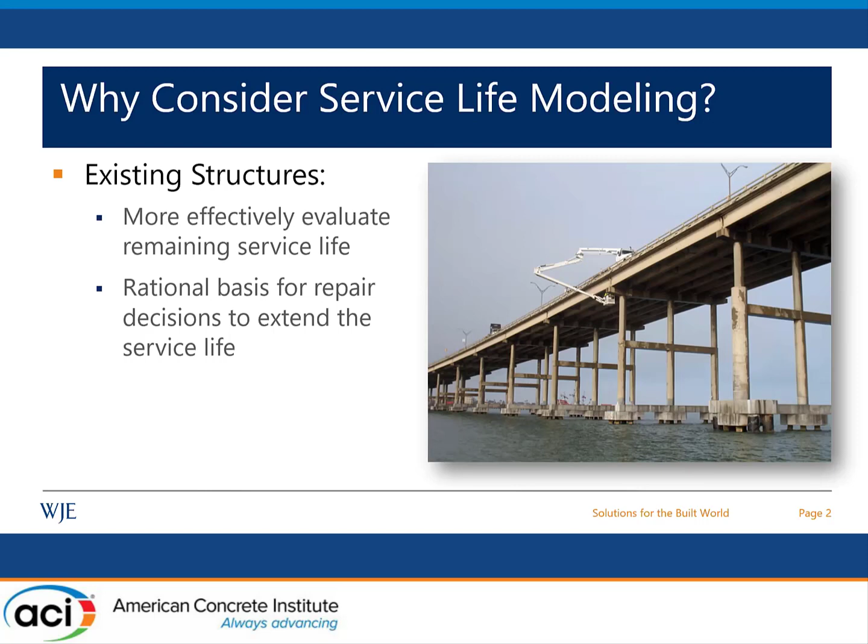To start with a little background, why do we usually consider doing service life modeling for existing structures? We do this type of analysis to more effectively evaluate the remaining service life, and also to provide a rational basis for repair decisions to extend the service life of the structure.

The best approach to predict the service life of an existing structure is by careful evaluation of its past performance and actual current conditions. We do that through field investigation.

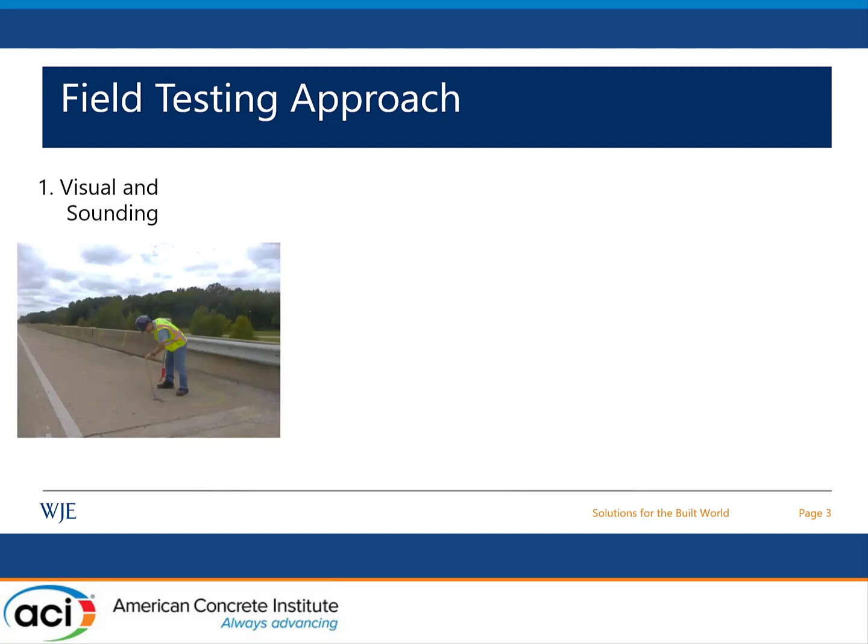Our typical approach consists of overall visual survey and sounding, and also scanning for reinforcement location and concrete cover using GPR or cover meters.

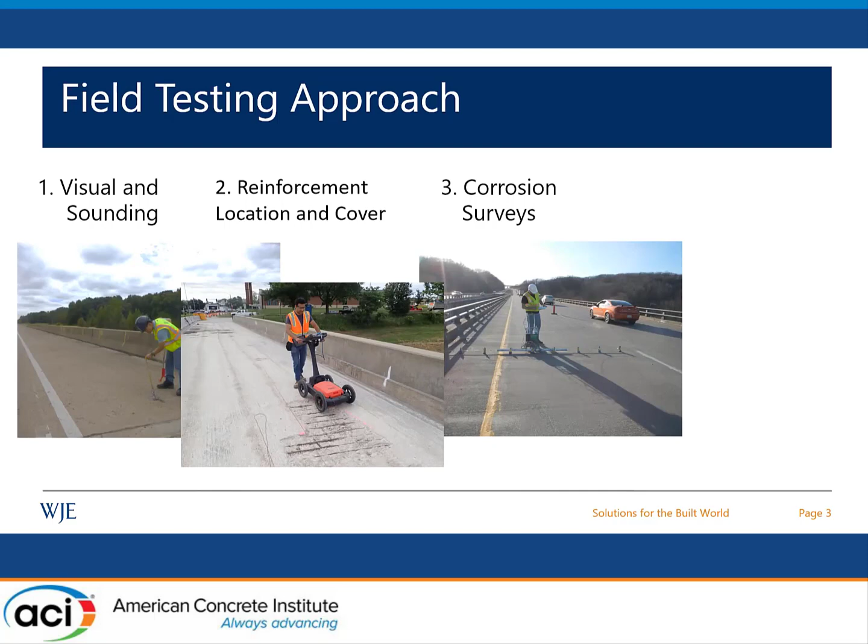We do corrosion non-destructive evaluation to provide an indication of the corrosion risk and also identify the location of active corrosion, using half-cell potential, corrosion rate measurements, and concrete resistivity. Then we collect material samples and perform laboratory testing.

After that, we feed all of this data into our service life modeling software. We use WJE CASLE.

It's a diffusion-based model that also considers the convection zone near the surface, where chloride transport is not necessarily governed by diffusion. Being developed in-house, WJE CASLE offers us full control over the evaluation process to facilitate a customizable approach to the circumstances and exposure conditions unique to each structure.

It can also consider site-specific conditions, including special cases such as sealers, coatings, use of corrosion-resistant reinforcement, and presence or installation of overlays. It can also consider the effect of cracking and pre-existing chloride profiles, which we are going to present in one of the project examples that Elizabeth is going to show us today.

We have used WJE CASLE in several projects, and to consider the inherent variability in the concrete elements, we use a full probabilistic modeling approach that considers a statistical distribution of key parameters controlling the corrosion process. We've used that for existing and new structures, including transportation, power generation, industrial, and government buildings.

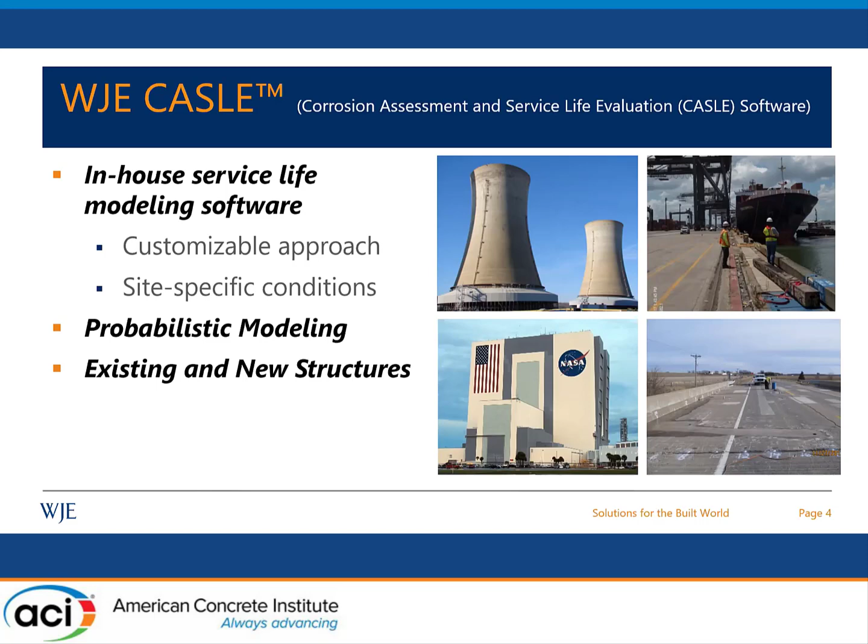As I mentioned, the inputs are derived from the condition assessment findings that we measure directly from the existing structure. These input data include exposure and concrete parameters, concrete properties parameters, and we collect this information based on testing of the concrete cores and the chloride profiles.

Another input is the cover, for which we use a specific distribution of the data collected from the structure. And chloride threshold, which is dependent on the type of reinforcement, also based on the mix design.

We learn about the mix design usually from petrographic examination of the core, or we also validate it based on the bar condition, which we determine through visual inspection of the bars, whether collected in the cores or through an inspection opening.

The output of our analysis would be the percentage of corrosion-related damage over time. Based on the damage threshold or the service life criterion, we can estimate the remaining service life.

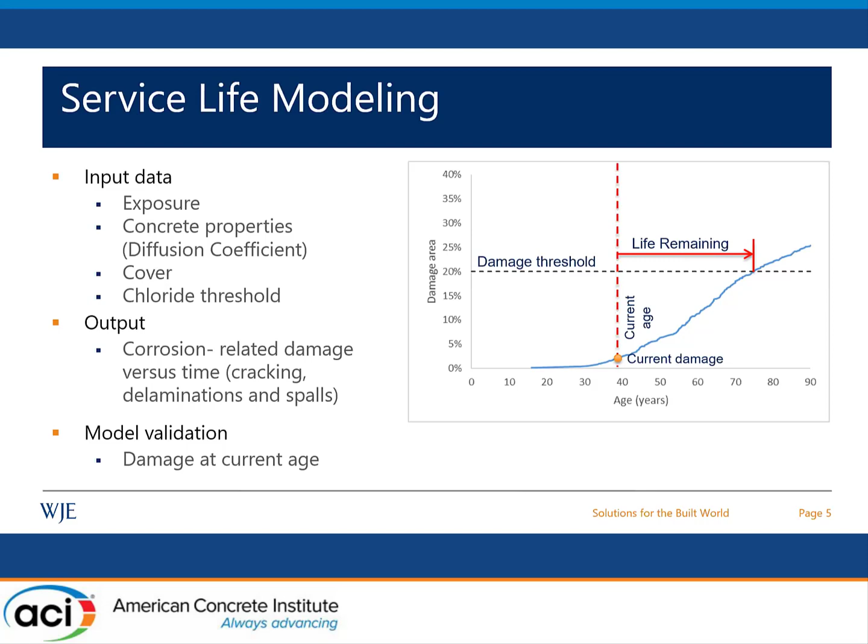Then we validate our results based on the percentage of damage at the current age, which we estimate based on the field investigation.

We did benchmarking and validation of our approach through different projects, including cooling towers and marine structures, and these projects included use of black bars, galvanized, and epoxy-coated bars. We continue to validate our model on ongoing projects.

Today we're going to focus on two project examples where we performed benchmarking and validation.

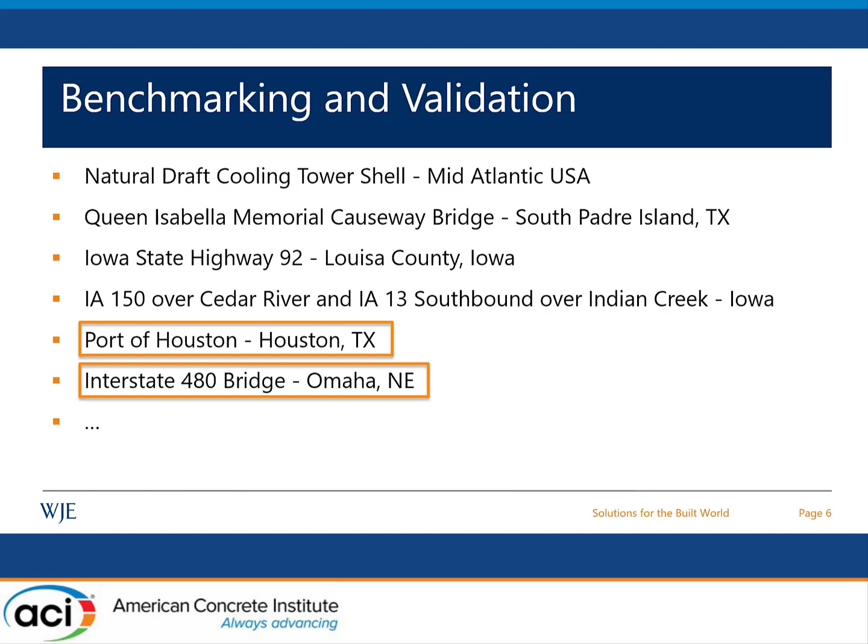Our first project example is Barbours Cut Terminal at the Port of Houston, located at Galveston Bay off the Gulf of Mexico. The water there is brackish, with salinity about one-third that of typical seawater, so there is plenty of chloride to cause corrosion risk in the reinforced concrete elements there.

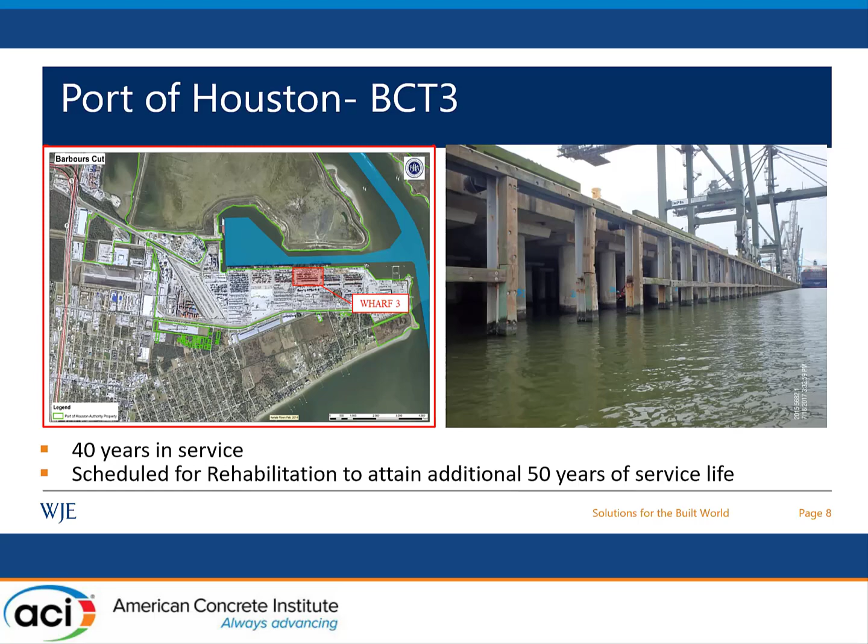We did our investigation after 40 years of the structure being in service. At that time, the structure was scheduled for rehabilitation to attain an additional 50 years of service life. This rehabilitation also included upgrading the structure to support new, bigger-size cranes, which included adding new elements such as drill shafts and some girders and a portion of the deck.

The objective of our investigation was to characterize the current condition of the existing structure to provide a basis for repair recommendations. To do that, we followed the same field investigation approach I mentioned earlier, starting with element-level visual inspection of all accessible elements, then selecting representative study areas for in-depth assessment, including cover measurement, corrosion NDE, and collecting material samples.

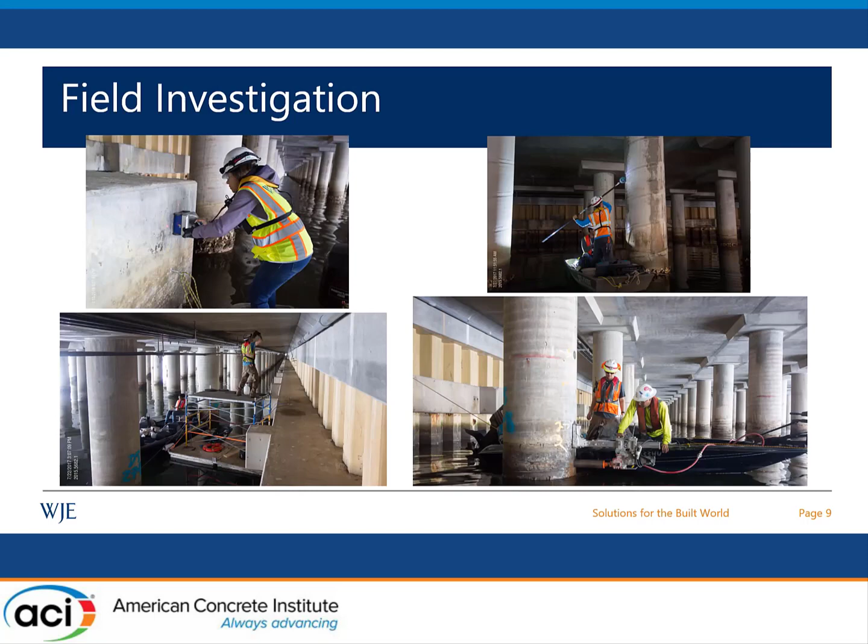So here I'm showing an example of some of the results collected at one of the study areas, on one of the drill shafts. Here's the half-cell potential results and also the location of the cores that we collected. We made sure to collect cores at different heights to capture different exposure conditions.

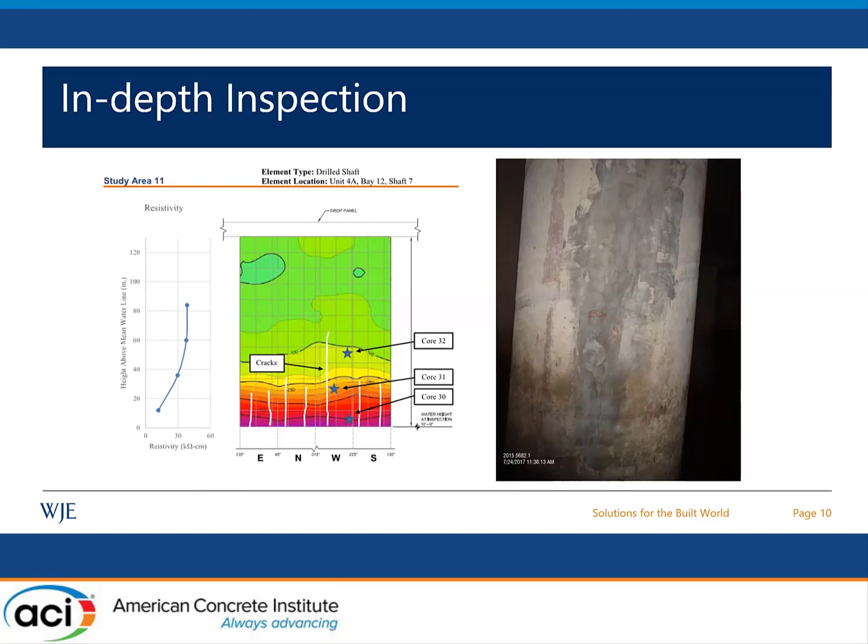Based on the test results we conducted during our investigation, we defined the different exposure zones: soil, submerged, tidal, splash, and atmospheric zones.

Based on our results, we found a strong correlation between the estimated surface chloride concentration and the corresponding height above mean lower low water level at which the cores were drilled. On the right here, I'm showing the figure of the surface chloride concentration estimated for the different cores, shown with the height above the mean lower low water, so with the different exposure zones.

We used this correlation for our modeling. So we used the power model fit for the surface chloride concentration with height. And to capture the variability of the surface chloride at a given height, we calculated the prediction interval, and we used a normal distribution at each height based on the prediction interval limits.

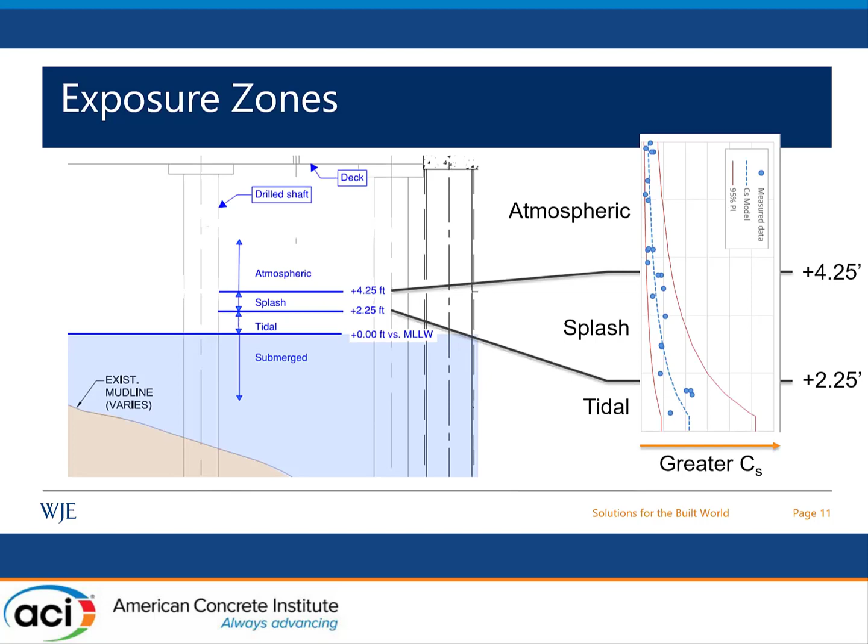So then we used WJE CASLE to perform our service life modeling, and here I'm showing the results for a couple of the elements in the structure: bulkhead beam and drill shaft.

For the bulkhead beam, for example, we had enough information from the field investigation about the percentage of damage on each of the three beam faces - the underside, vertical, and top side. So we modeled those separately over the next 50 years, which puts us at an age of 90 years.

As you can see, the damage is expected to increase on all surfaces with time. And the model actually showed close correlation to the amount of damage that we observed in the field, which verified our modeling results. Based on the results, we identified high risk for future corrosion deterioration, and we recommended preventive repairs needed for all the surfaces.

A similar approach we used for the drill shaft, where we verified our model using our field investigation results. We found a good correlation between the percentage of damage predicted using our model and the percentage of damage from our field investigation.

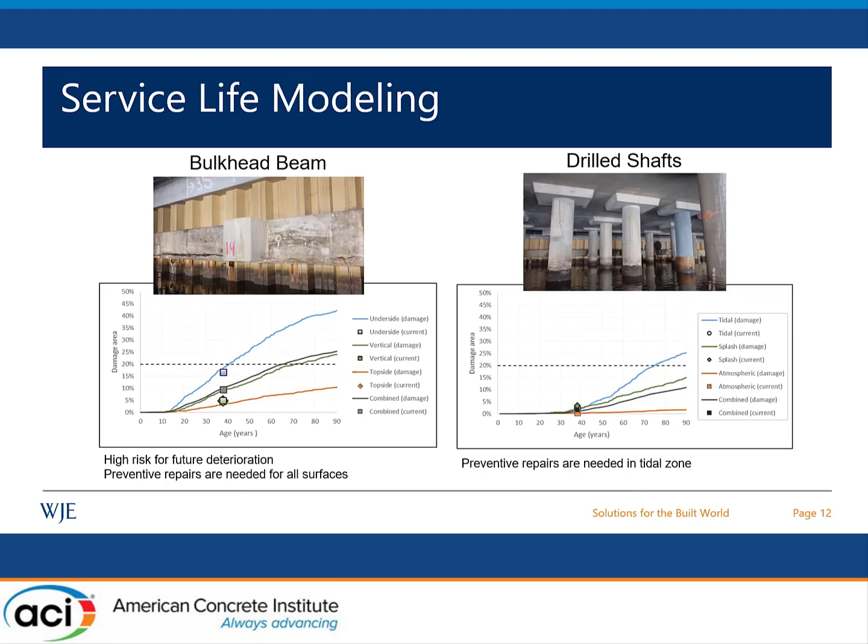Based on the service life modeling results, we recommended preventive repairs needed in the tidal zone to achieve the additional 50 years of service life.

We used all the information we gathered from our investigation at the existing structure to inform the durability design of the new structure. The correlation for the surface chloride concentrations, we used that along with what we learned about the propagation time for the different exposure zones to run service life modeling, considering different alternatives for concrete mix parameters, reinforcing material, and concrete cover thickness to achieve 50 years of design service life.

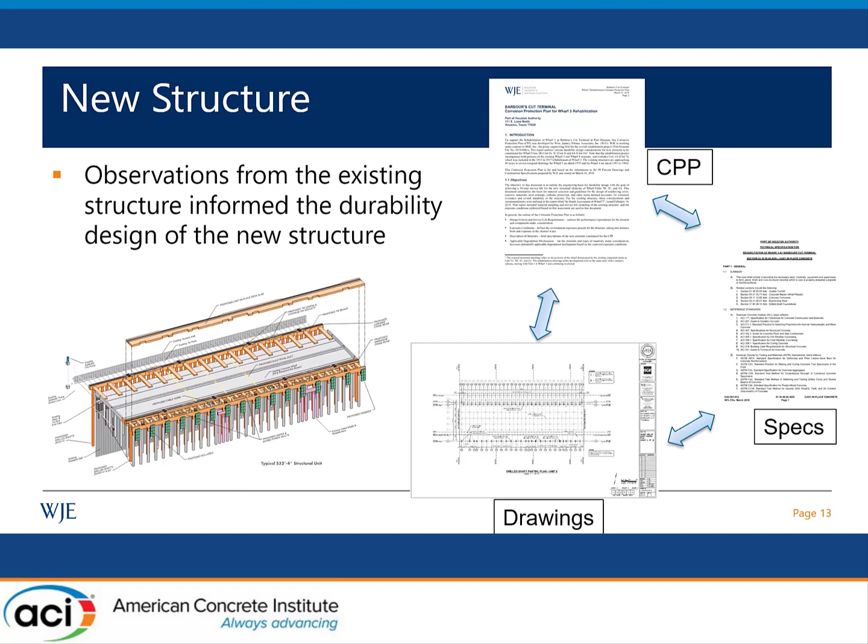Based on that, we recommended concrete mix design parameters that were summarized in a corrosion protection plan or reflected in drawings and specifications. And with that, I'm going to give control to Elizabeth to present our next project example.

Thank you, Marwa. I'm going to turn the attention now to another project example, which is the Interstate 480 Bridge Piers in Omaha, Nebraska.

The I-480 is a roughly 1.5 mile long overpass system in downtown Omaha. The bridge piers themselves were constructed around 1970.

After about 30 years in service, there was a condition assessment performed by others on behalf of the Nebraska Department of Transportation in 1997 that looked at the condition of the bridge piers and made recommendations for their repair and maintenance. This condition assessment included things like chloride sampling, delamination surveys, and crack surveys.

Based on the findings, the party that performed that assessment recommended a series of rehabilitation activities between 1998 and 1999. This included replacement of all of the joints and drainage systems on the entire length of the bridge section in this area, as well as surface repairs of 61 of the piers and electrochemical chloride extraction treatment, or ECE treatment, of 26 of the piers.

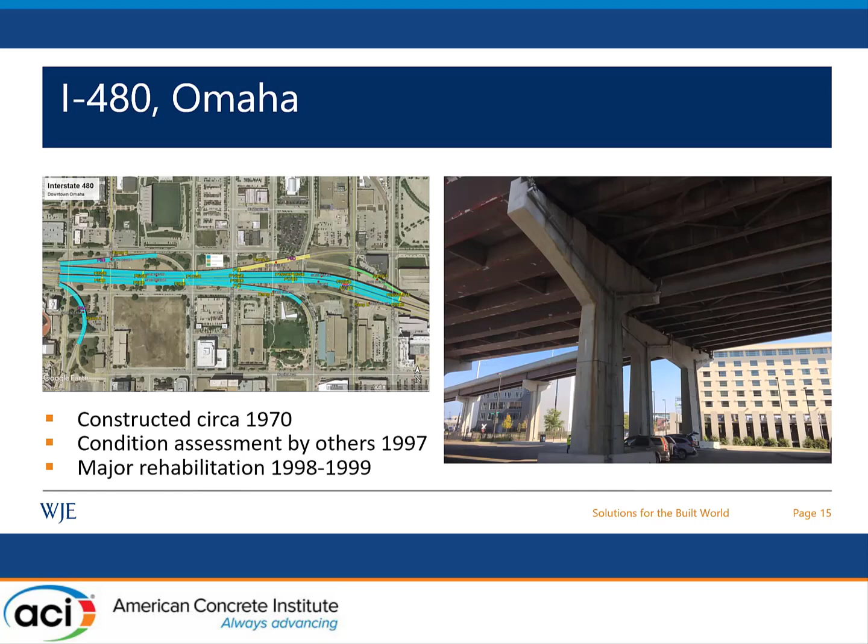So what ECE treatment is, is a surface treatment that's applied to concrete structures where an electrical field is applied between the reinforcing steel and a temporary surface mounted electrode on the surface of the element. This electrical field pushes the chlorides from the reinforcing steel back out of the concrete and into this temporary surface anode, which is then removed after the treatment, taking all of these chlorides out of the concrete with it.

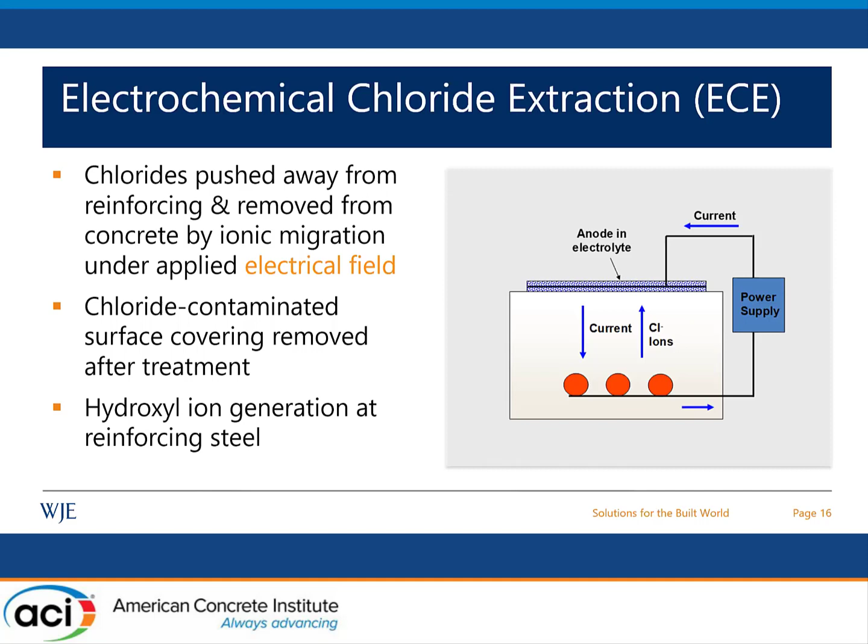As an additional byproduct of this process, there's also hydroxyl ion generation at the reinforcing steel, which can help to repassivate the steel that has already initiated corrosion.

WJE went out to these bridge piers in 2018, about 20 years after the major rehabilitation effort, and our purpose was to perform a condition assessment and service life model of the piers.

We looked at specifically 18 of them - 14 which had been treated with ECE and 4 which had not. Our objectives were to assess the current condition of these piers, predict the remaining service life so that we could help inform repair decisions, and then also evaluate the effectiveness of the ECE treatments.

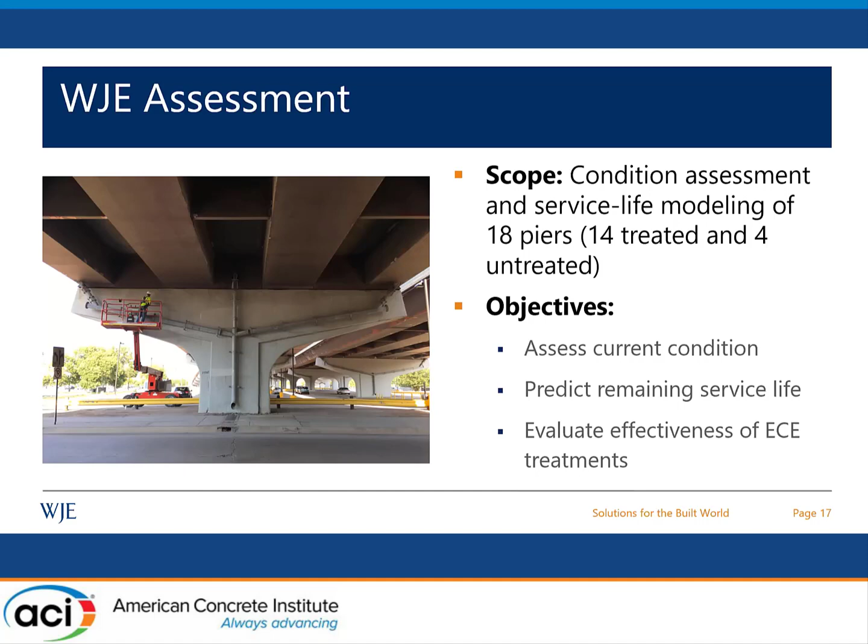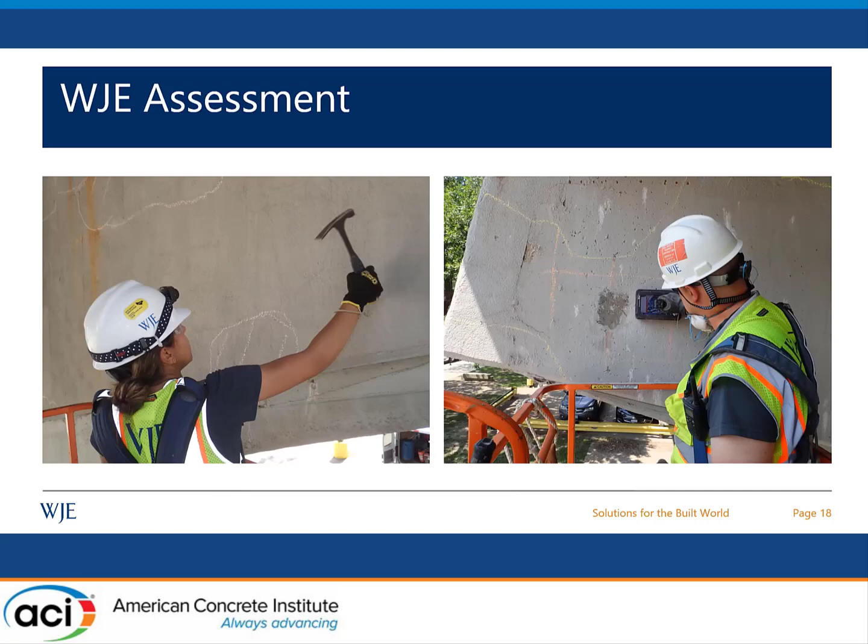Like Marwa showed in her previous slides, our field evaluation included a combination of visual and delamination surveys, GPR cover surveys, core sampling, and corrosion rate measurements. Our findings showed that there were various levels of distress currently present at the bridge piers.

This is an example of one of the more severe cases of deterioration. You can see in the figure on the left that there were a number of delaminations occurring in areas that had been previously repaired in the 1990s, which suggests that the same root causes of the failing joints and failing drainage system were causing a lot of the corrosion-related activity and chloride exposures we were seeing.

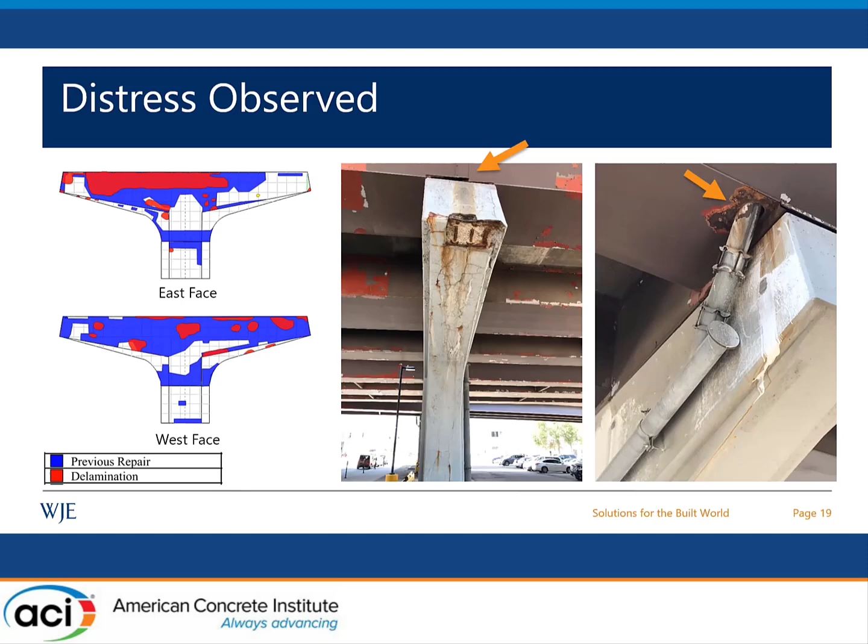So based on our field observations, we grouped the piers into two categories. One was primarily piers located at expansion joints, which we considered to have high exposure to chlorides. These were typically characterized by moisture staining, corrosion staining, some efflorescence on the surface, and in some cases peeling away of the surface coatings. Other areas, primarily away from the expansion joints, we identified as low exposure.

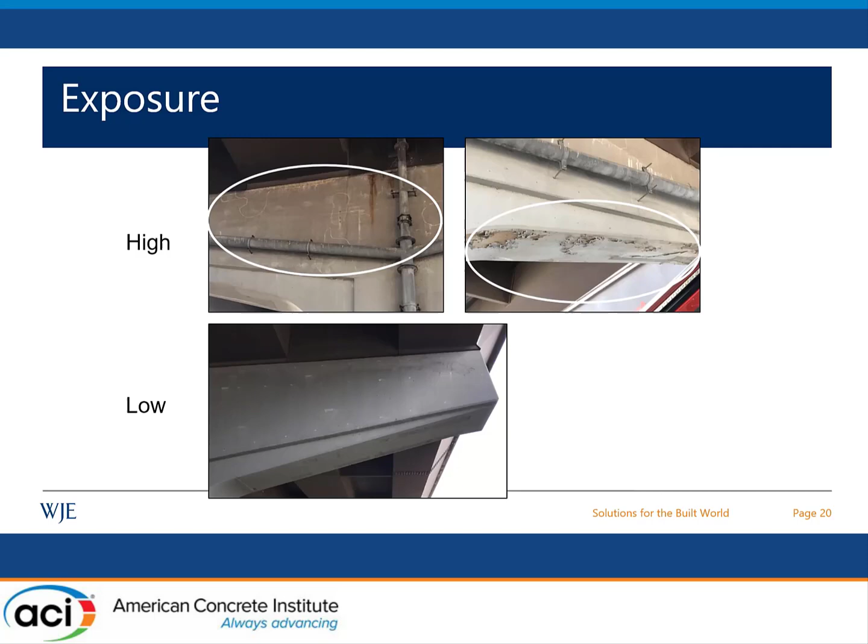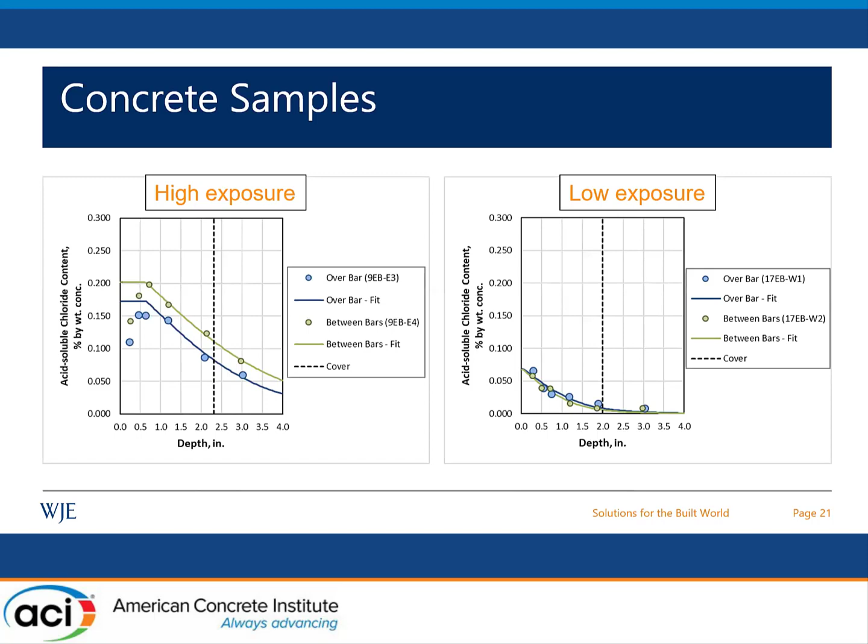We took a total of 36 concrete core samples from these areas and divided them into high exposure and low exposure categories. Using the chloride profiles obtained from each of these cores, we fitted diffusion coefficients and surface chloride estimations to get an estimate of the concrete's diffusion characteristics and the average exposure conditions in these two areas.

We also performed a service life model looking at these two exposure classes, the high exposure and the low exposure. But our models also considered the effect of the ECE treatment itself.

So I'll show an example of what the chloride profile might look like in one of these higher exposure areas. Initially we have no chlorides present, but over time, 10, 20 years, and all the way up through 1999, these chlorides are starting to build and diffuse through the concrete. Once the ECE treatment is applied, we consider there to be a reduction in the chloride concentration.

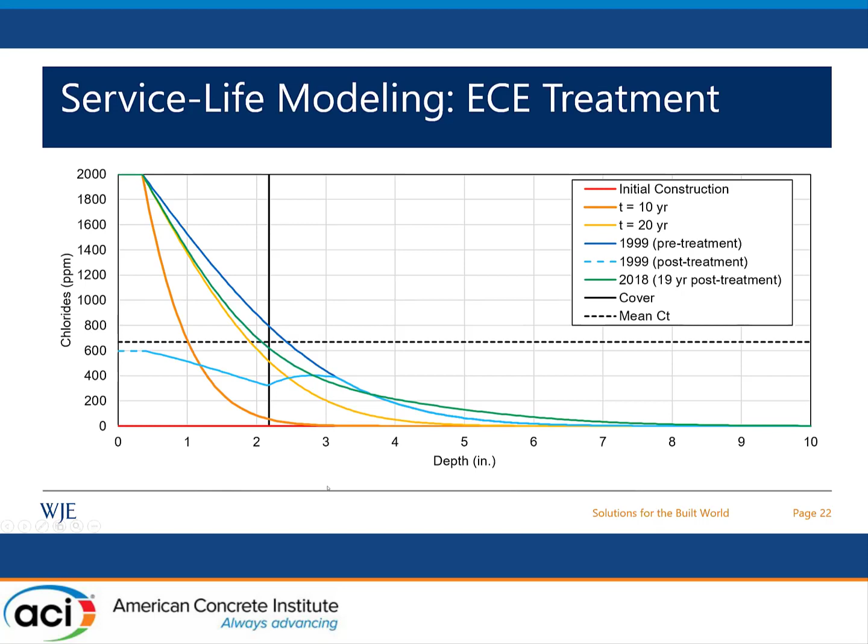We assumed an average of about 60 to 70% reduction based on the measurements performed by the party that had performed the ECE treatment in 1999. This modified chloride profile is then progressed forward in time so that we could obtain estimates of the current chloride profiles and compare those to our models.

So we had a couple cases that we benchmarked with our models. The first is the 1997 field investigation. There were powder samples drilled from the piers, and chloride concentrations were measured at depths between 0 and 1 inch and 2 and 3 inches.

So we looked at our models' estimates of what the chloride profiles would have looked like in 1997 and compared those to what was actually measured on the piers. We found that our predictions were within about 10% of the measured values on average, which gave us good confidence in our model.

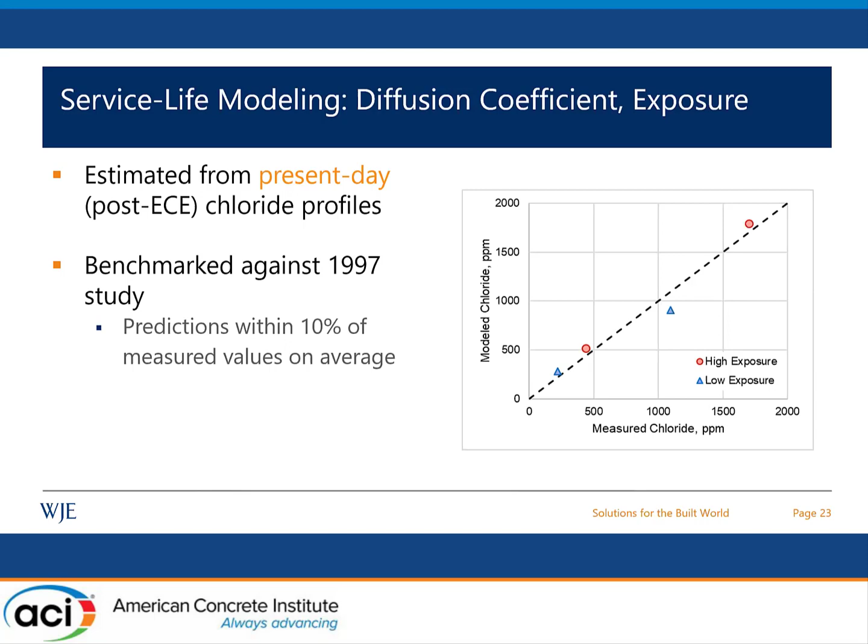Additionally, when we looked at the amount of damage predicted in both the cases of high and low exposure, in cases with ECE and repairs, and in cases where there were untreated piers, we compared that to the observed damage documented in the 1997 inspection and our 2018 inspection, and again found very good correlation between the observations of both studies and what our model was predicting.

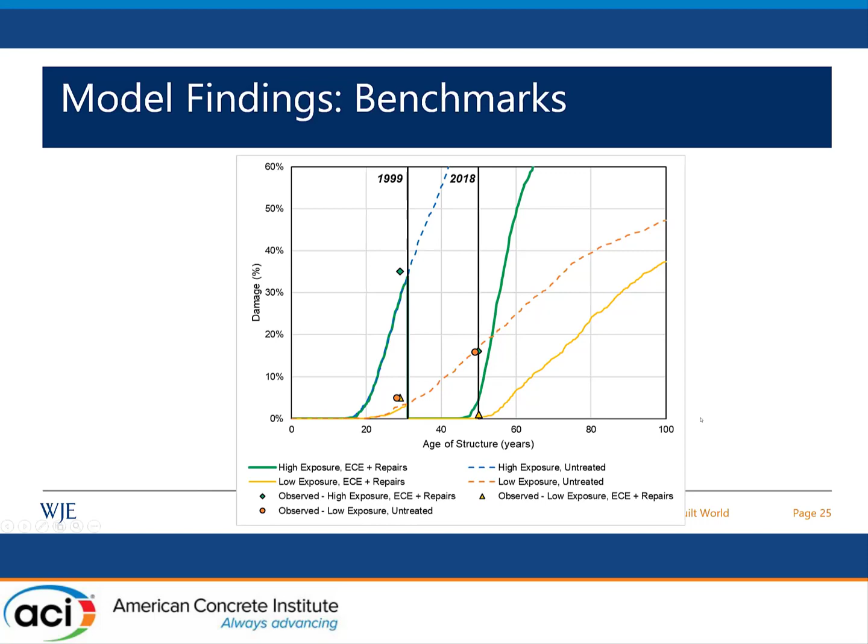Based on our model findings, we were able to estimate that the rehabilitation, which included the ECE and joint repairs, extended the service life by about 30 years. However, we also found that moving forward in time, there was a high likelihood that we would exceed damage fractions of 20 or even 30% on these piers, and that they wouldn't necessarily reach the intended additional 30 years of service life. So we recommended to the DOT that they perform repairs of all the expansion joints and drains to help limit some of those chloride exposures.

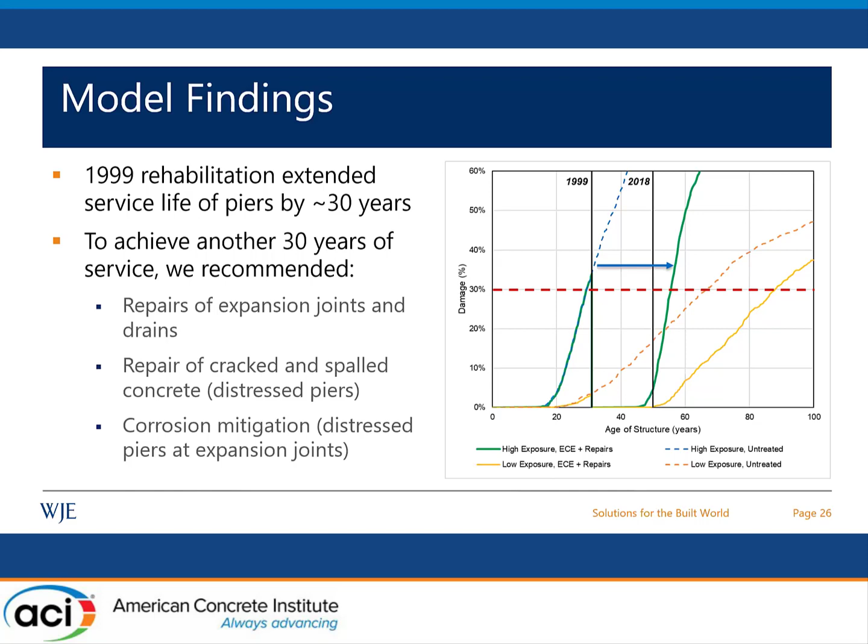We recommended repair of cracked and spalled concrete in those particularly distressed areas of the piers. And in the piers that were distressed and located at expansion joints, we also recommended additional corrosion mitigation.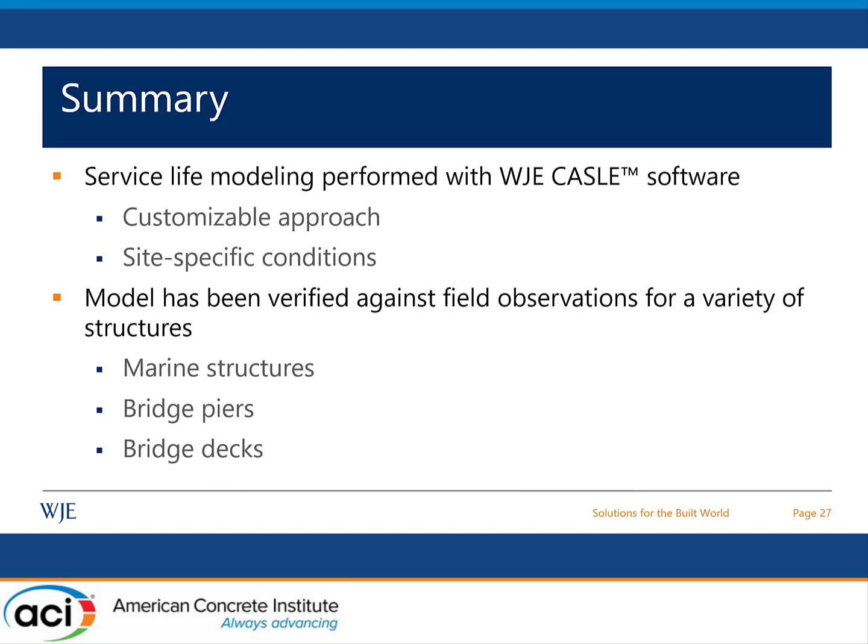To summarize, our service life modeling was performed with WJE CASLE software, which offers a customizable approach that we can use to consider site-specific conditions, such as the variation in chloride exposure like Marwa presented for marine structures, or the application of ECE treatment like I've just presented. Our model has been verified against field observations for a variety of structures and agrees well with the amount of damage and chloride profiles we've observed in marine structures, bridge piers, and bridge decks.